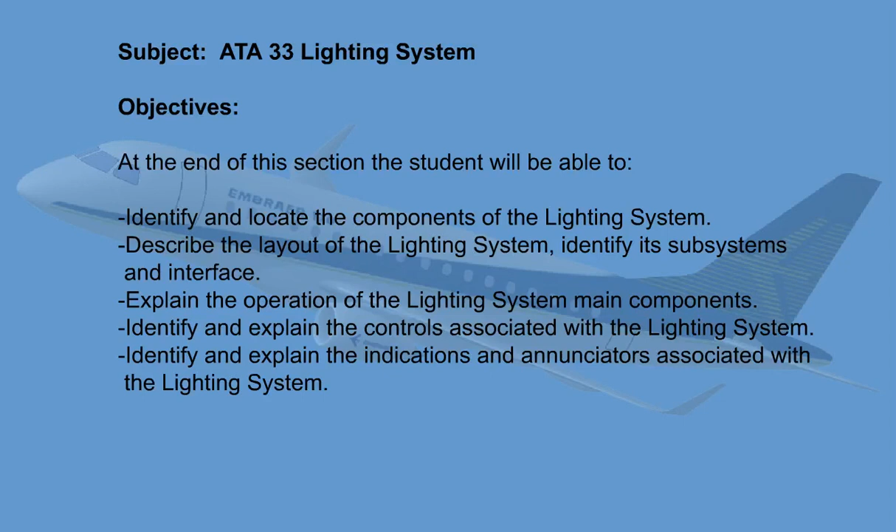The EMBRAER E190 lighting system provides lighting to all essential parts of the aircraft. It assures safe and proper operation under normal and emergency conditions.

Inside the aircraft, light is provided to the cockpit, cabin, cargo and service compartments. Outside light is provided for navigation,

orientation, and identification. In the event of an emergency evacuation, a group of 3 overwing emergency lights located near each overwing emergency exit will illuminate to indicate the evacuation direction. In case of total power loss, power units provide temporary DC power for emergency lighting.

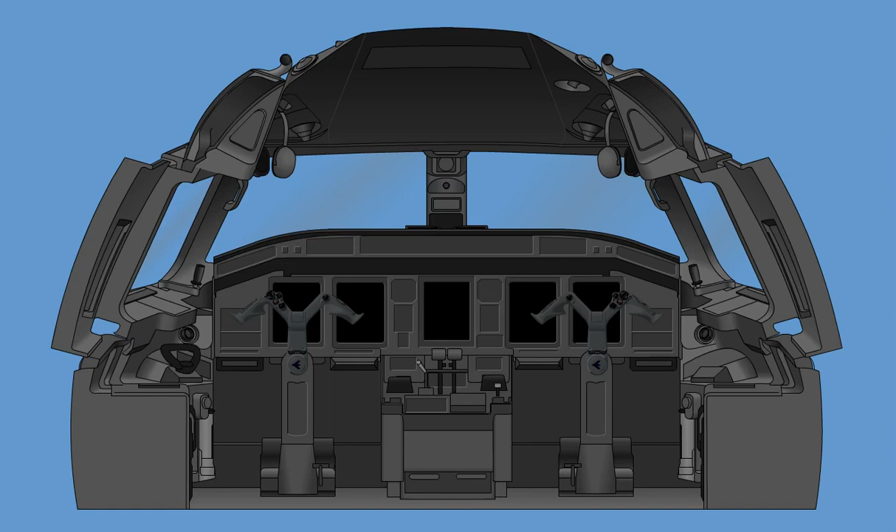The flight compartment lighting system provides lighting to the work area, panels, and instruments, and consists of the following subsystems: the cockpit light system, which provides beam ambient lighting used on the sidewalls, seats, and floor of the crew station and observer area; the instrument and control panel light system, which provides lighting for instruments, panels, and push buttons; and the flood storm light system, which provides a proper lighting level in the cockpit for the instruments and assures instrument readability.

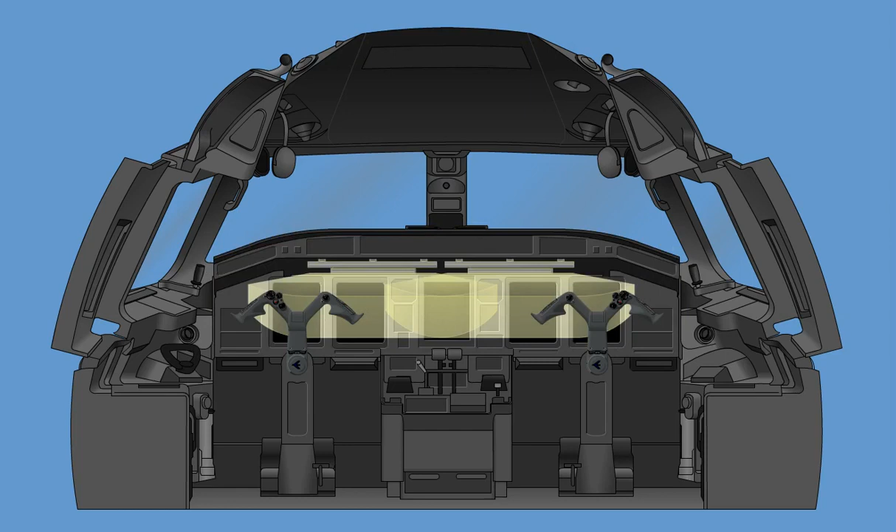The cockpit lights include the following components: 2 dome lights located on the cockpit ceiling, which are controlled by a switch on the overhead panel. Power to the dome lights is supplied by the essential DC bus number 3. This permits cockpit lighting in electrical emergency conditions.

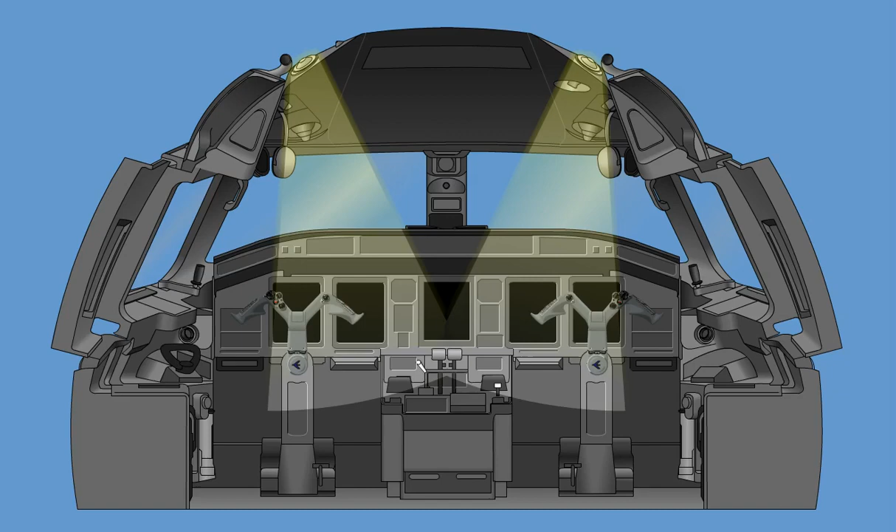The pilot, co-pilot, and observer reading lights installed on the ceiling help the flight crew to read maps, checklists, and manuals. The lighting intensity level can be adjusted by clockwise or counterclockwise movements of the reading light's inner bezel. The units permit light beam orientation, zoom, and full movement in any direction by turning the outer bezel.

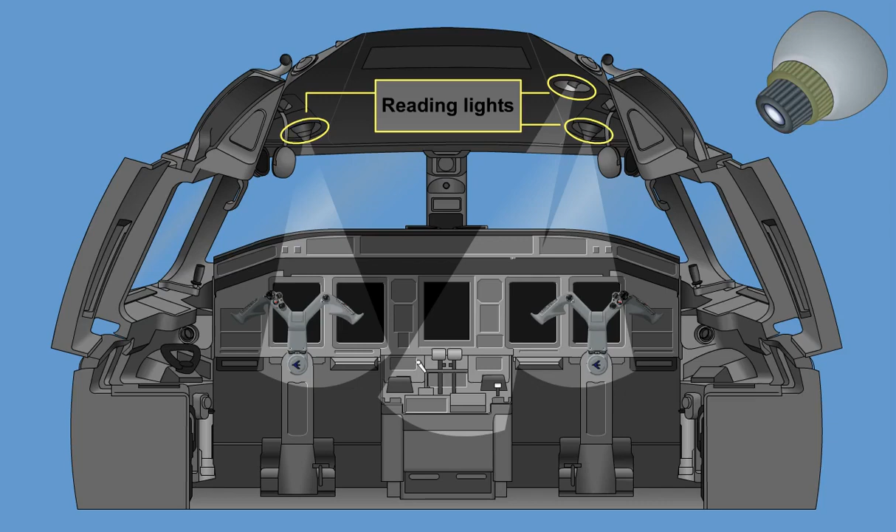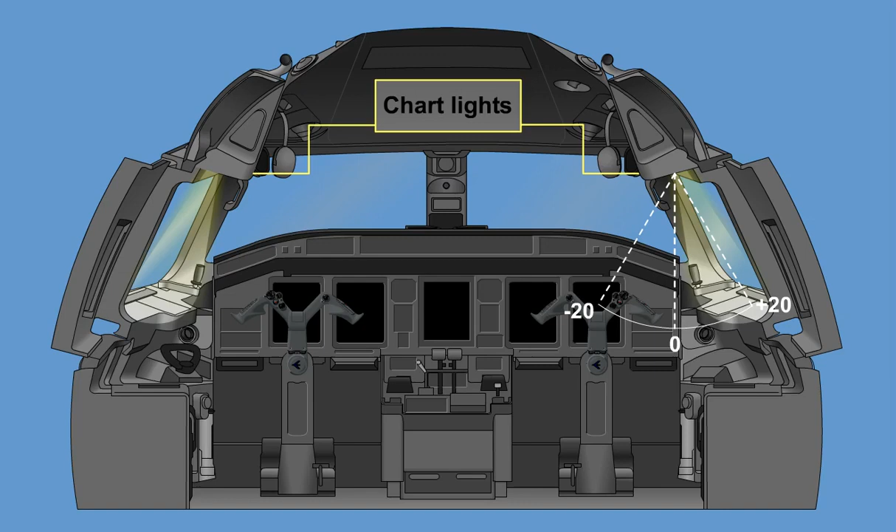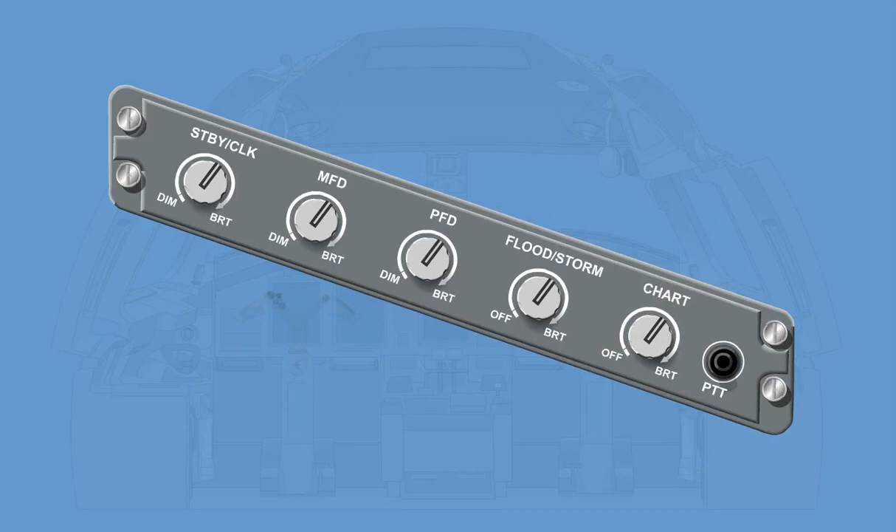The pilot's and co-pilot's chart holder assembly each have an associated chart light for adequate illumination. They are located over the left and right side windows. The light beams can be deflected up to 20 degrees from vertical axis, which provides a total movement of approximately 40 degrees. 2 on-off variable intensity potentiometers, located on the pilot's and co-pilot's glare shield panels, control the chart holder light's brightness.

Turning the knob to the full counterclockwise position turns the light off. Integrated in the overhead panel is the light's control panel. It associates with the on-off variable intensity potentiometers. Turning these potentiometers in the clockwise direction brightens the background lights of the main panel, the overhead panel, and the pedestal.

As a discrete function of the overhead panel potentiometer, the annunciator lights can be set to daylight, bright, and nighttime, dim illumination. Turning the overhead panel lights to the off position will automatically set the annunciator lights to bright intensity.

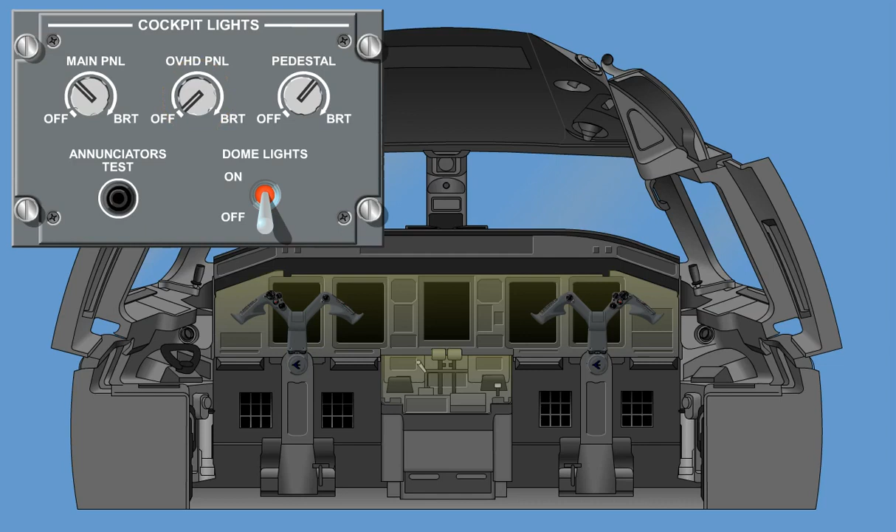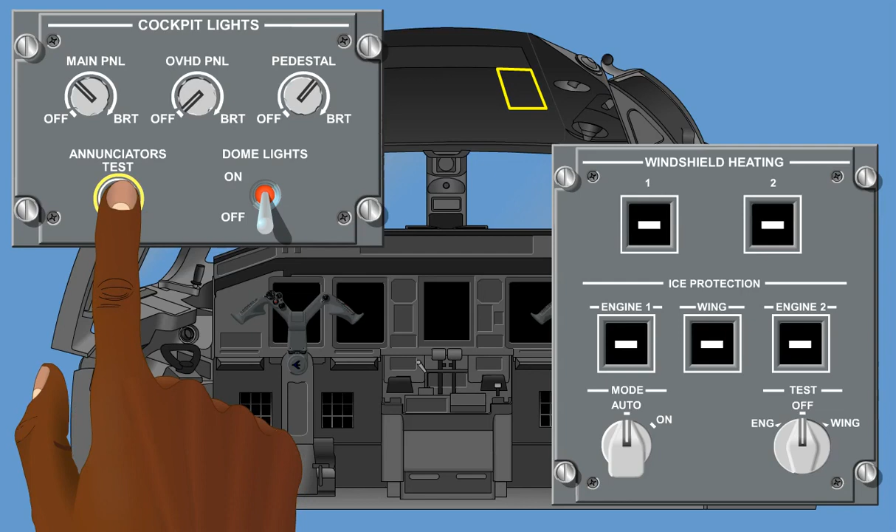The annunciator's test switch, when actuated to the test position, momentary position, allows checking of the striped bars and caption indications in all push buttons located on the main panel, the overhead panel, and the control pedestal, allowing verification of lamp integrity.

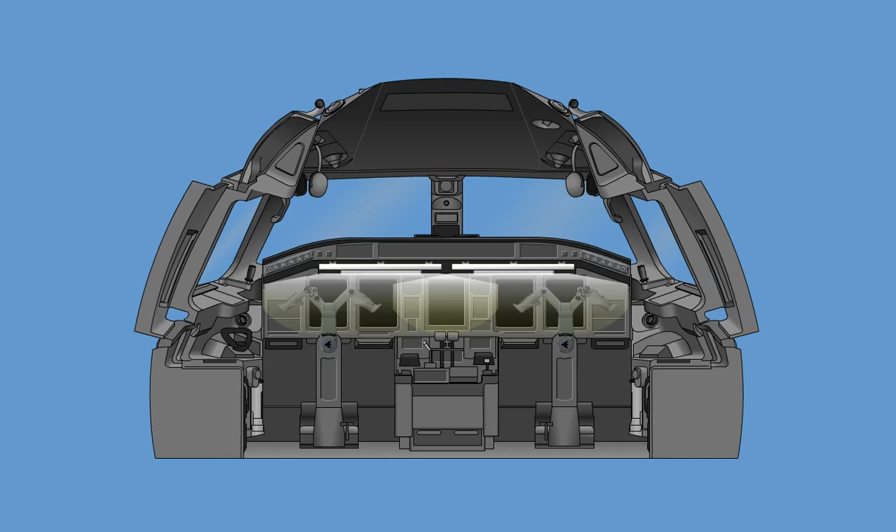The flood or storm lights provide sufficient lighting intensity to illuminate the main cockpit panel during lightning conditions and to avoid blinding of the pilot's and co-pilot's eyes. The floodlights are located under the main panel and controlled by an on-off variable intensity potentiometer on the glare shield panel.

The pilot's PFD, MFD, and EICAS display brightness controls are located on the left glare shield panel, while the co-pilot's PFD, MFD, and standby instruments brightness is controlled from the right glare shield panel.

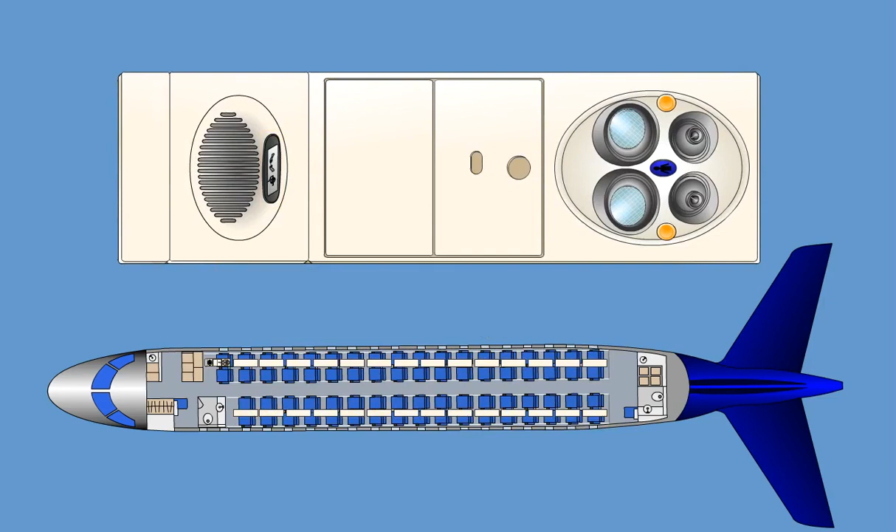The passenger compartment lighting system provides illumination for the cabin. It consists of the passenger cabin light system, the passenger warning signs system, the reading and attendant call light system, the courtesy stair light system,

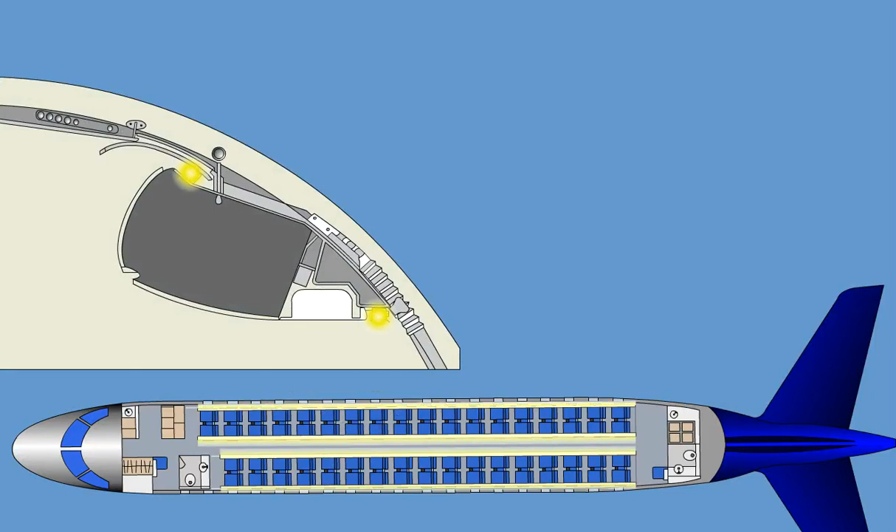the lavatory light system, and the galley light system. The passenger cabin lights provide general illumination of the cabin and include the ceiling lights mounted above the passenger service unit structure and the sidewall lights mounted along the sidewalls.

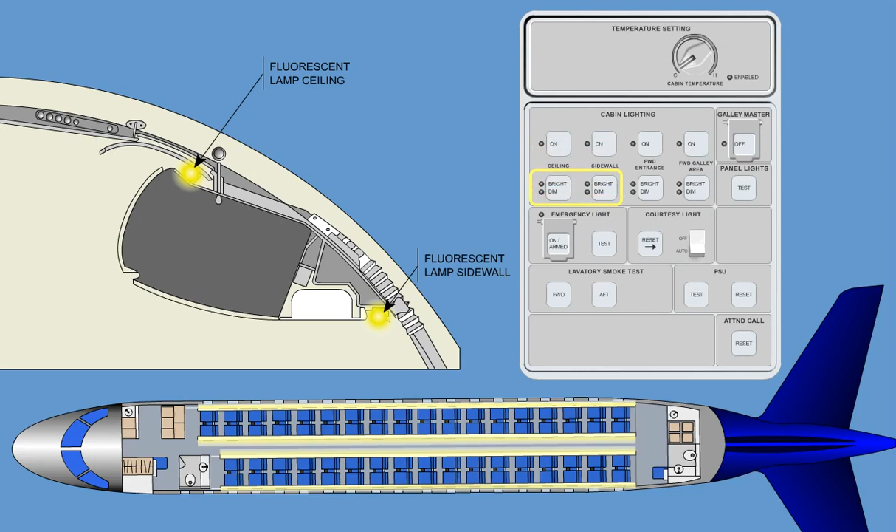Control is provided by 4 switches located on the forward and aft flight attendants panel. 2 of the switches are used to turn the lights on and off, and the other 2 switches are used to control the brightness of the lights.

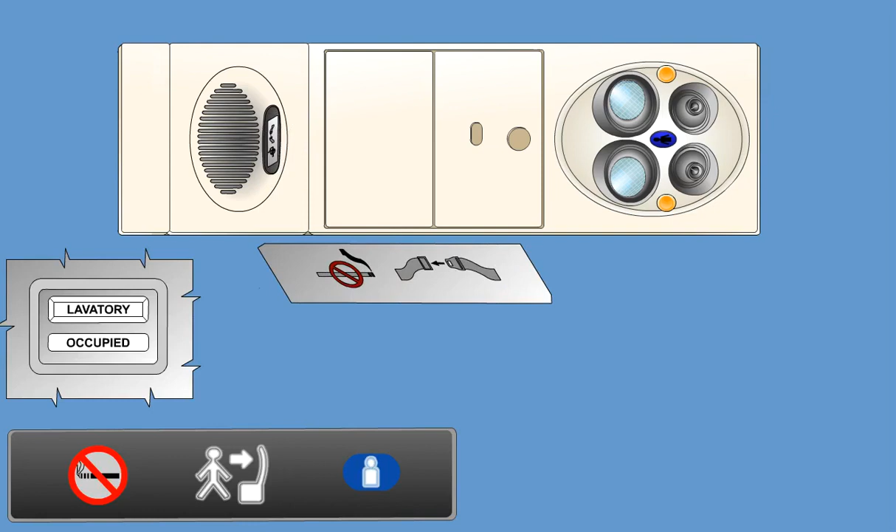The passenger warning signs provide the passengers and flight attendants with the following signs: no smoking, fasten seat belts, return to seat, and lavatory occupied.

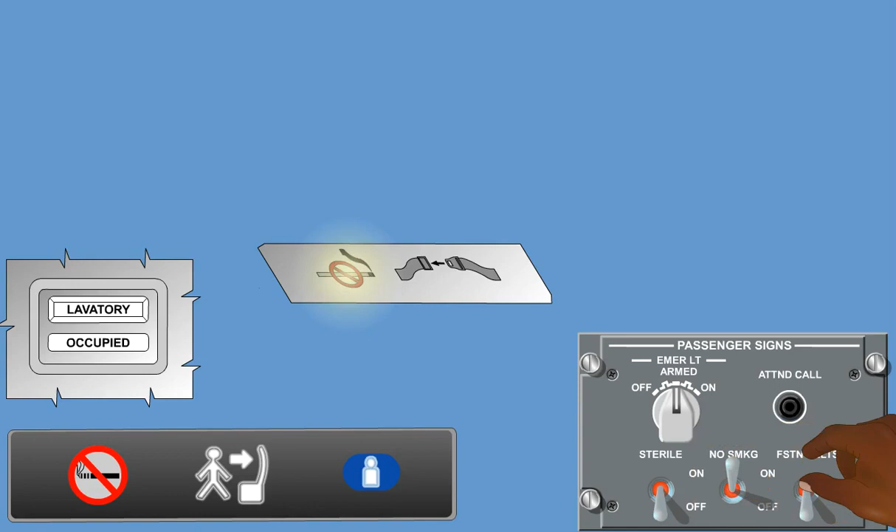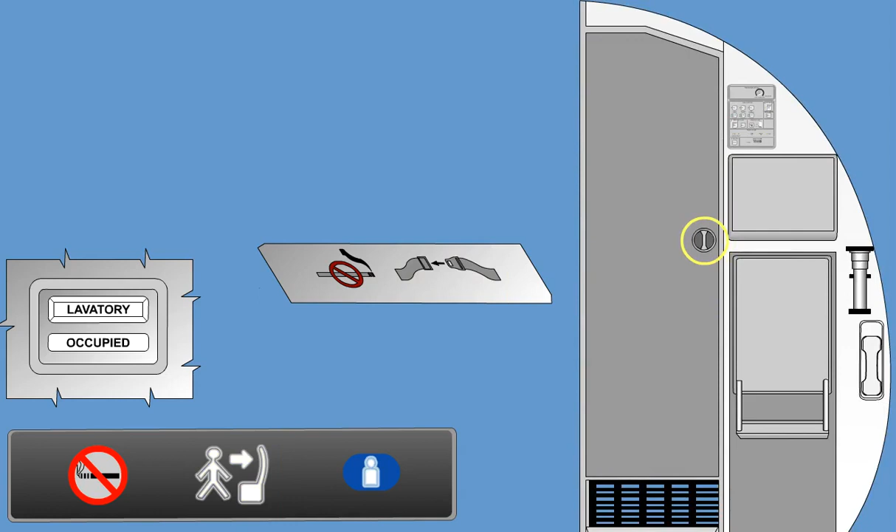The system comprises the no smoking switch located on the overhead panel, which controls the no smoking signs located in the passenger service units; the fasten seatbelt switch, also located on the overhead panel, which controls the fasten seatbelt signs located in the passenger service units, the return to seat sign in the lavatory, and the lavatory door latch engaged switch, which controls the lavatory occupied signs.

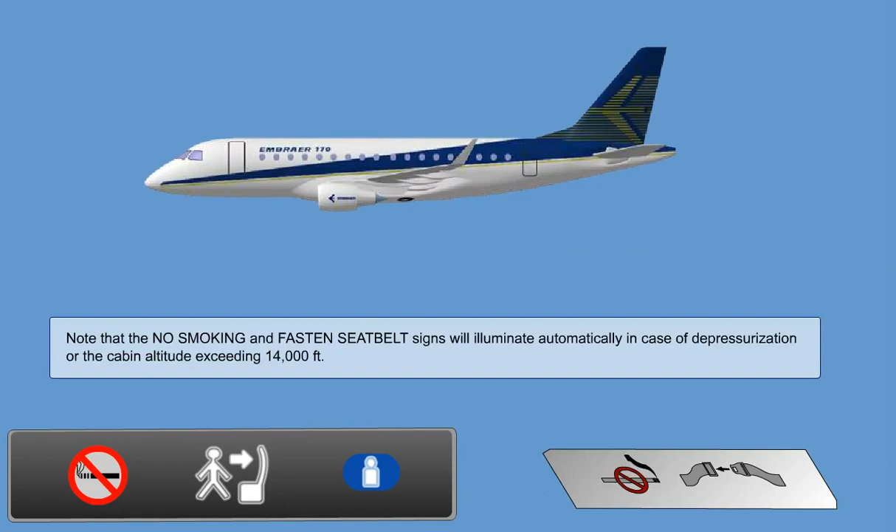Note that the no smoking and fasten seatbelt signs will illuminate automatically in case of depressurization or the cabin altitude exceeding 14,000 feet.

The reading and attendant call light system provides adequate lighting for reading and information for attendants regarding passenger or pilot needs.

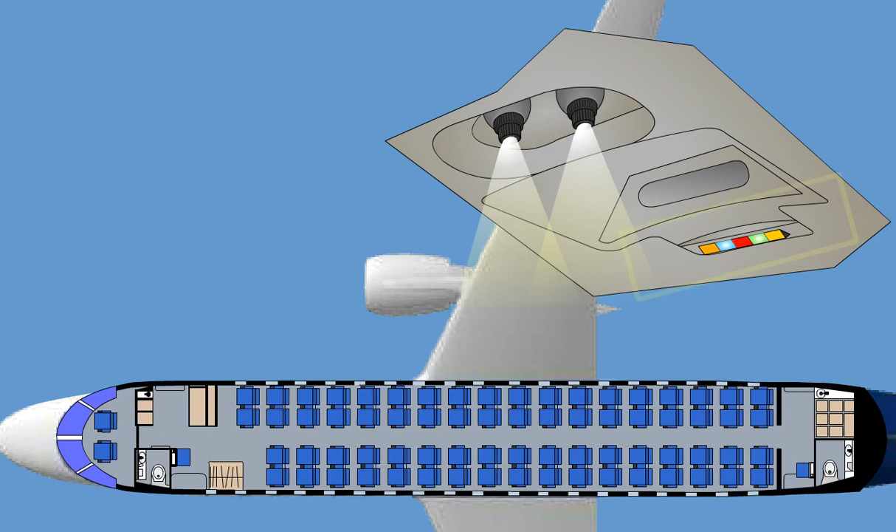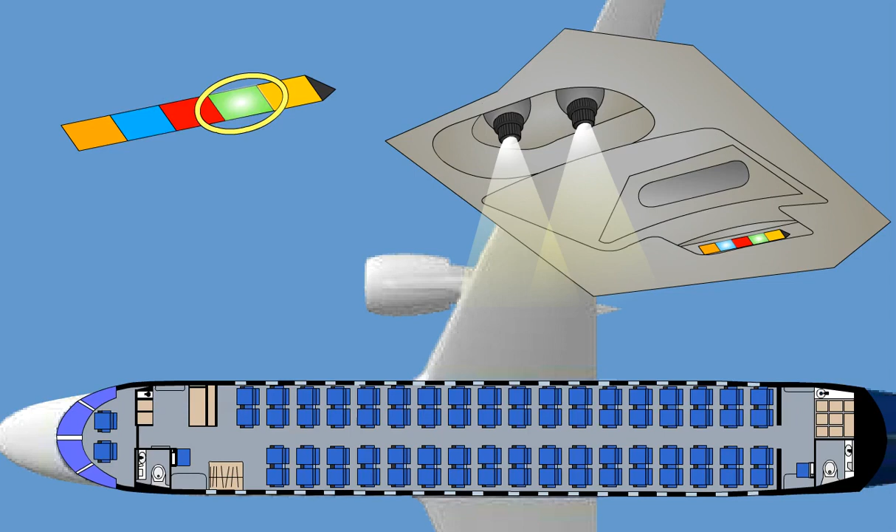Attendant call lights located on the forward and aft main ceiling panel areas provide visual indication to the cabin crew when there is a call from the pilots or passengers. The orange light indicates a lavatory call, the blue light a passenger call, the flashing red light a pilot emergency call, the green light a pilot call, and the ambered colored light indicates a sterile light call.

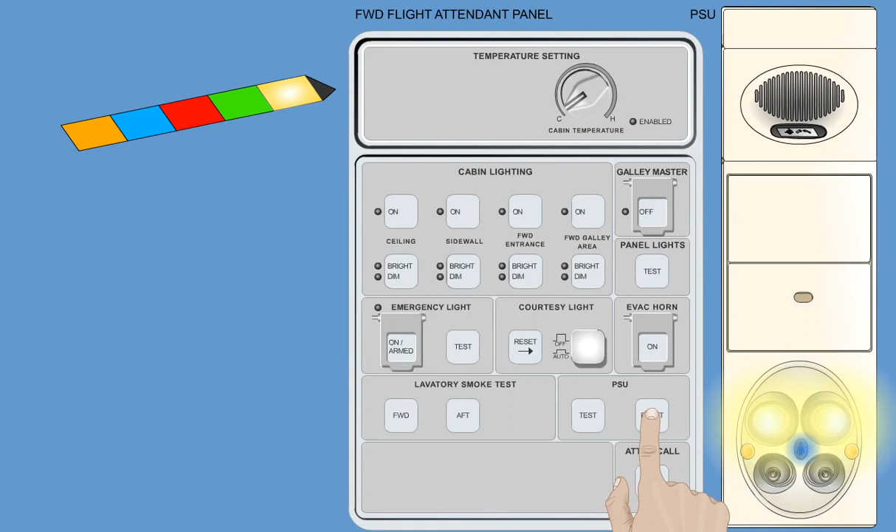Test switches installed on the attendant panel are used to check the PSU reading lights, the attendant call lights, and the attendant call annunciator lights. Attendant call switches are located on each passenger service unit and in the lavatory.

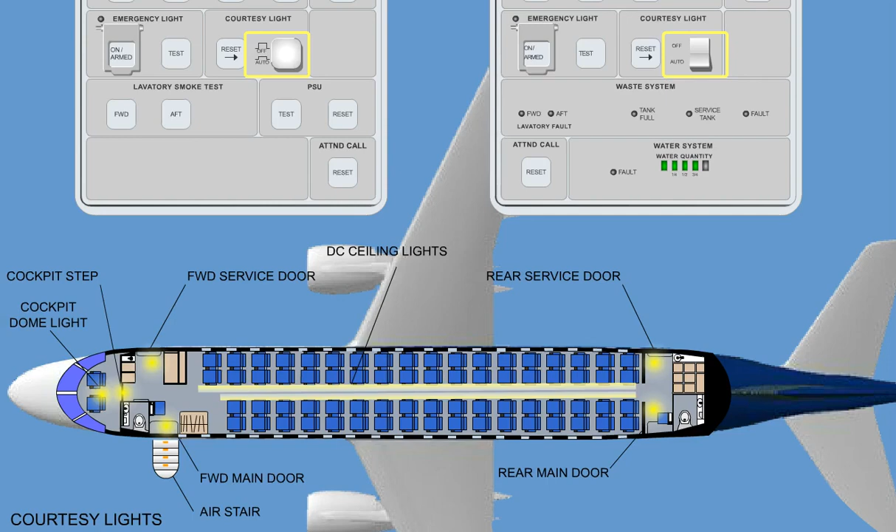The courtesy lights provide lighting for forward and rear main and service door entrances, the air stair, the cockpit step between the cockpit and the cabin, the cockpit dome lights, and the DC ceiling lights mounted on the overhead bins. Courtesy lights are controllable by a switch mounted on the flight attendant panels, giving the crew the option of off or auto mode.

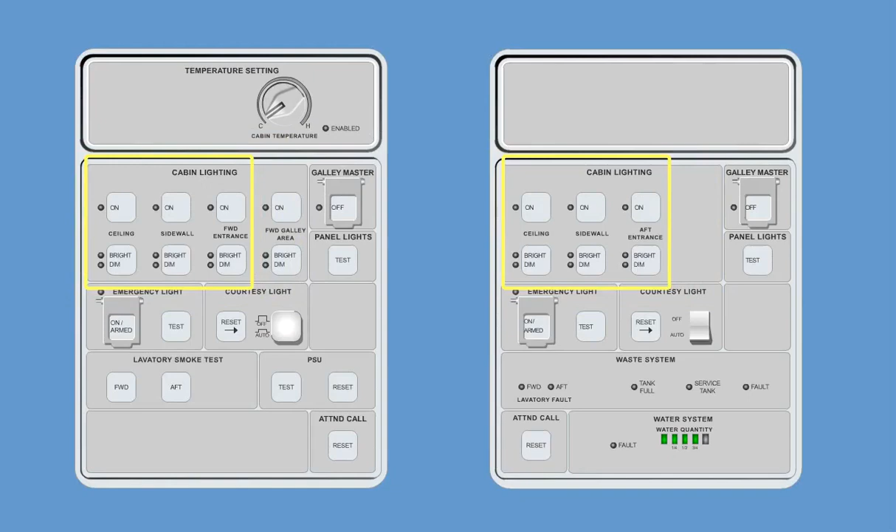Under normal operating conditions, the DC lights are controlled by the cabin lighting system. When normal aircraft power is not available, for example on ground with the APU not running, it is still possible to use the courtesy lights and DC ceiling lights. In this case, the hot bus provides power to these lights. To conserve battery power, these lights operate on a 5-minute cycle. A reset button located on the flight attendant panels, and as an option on the cockpit pedestal panel, allows an additional 5 minutes of lighting every time the switch is pressed.

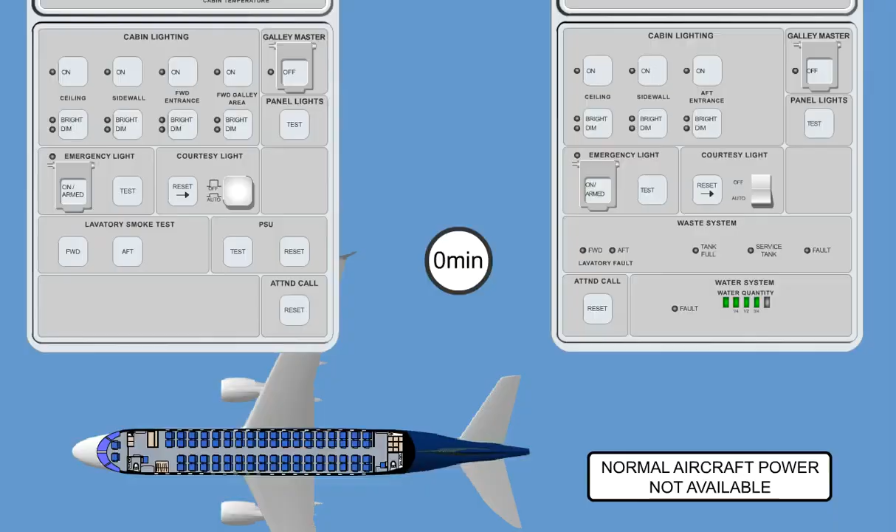The lavatory light system provides ceiling and sidewall lighting in the lavatory area. When electrical power is applied to the aircraft, the ceiling lights come on in dim mode. As long as the toilet door is not latched, the lights remain dimmed.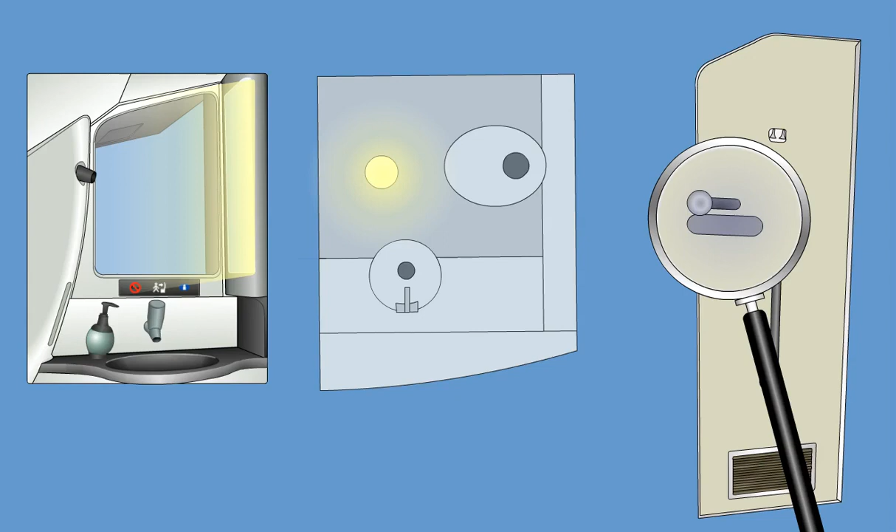If the toilet door is closed and latched, the ceiling lights, the cabinet and sink lights will come on in the bright mode. At the same time, the lavatory occupied sign will illuminate in the cabin.

The forward and aft galley light systems provide a direct light source in the galley area for the flight attendants. The galley lights are controlled by switches installed on the respective flight attendant panels.

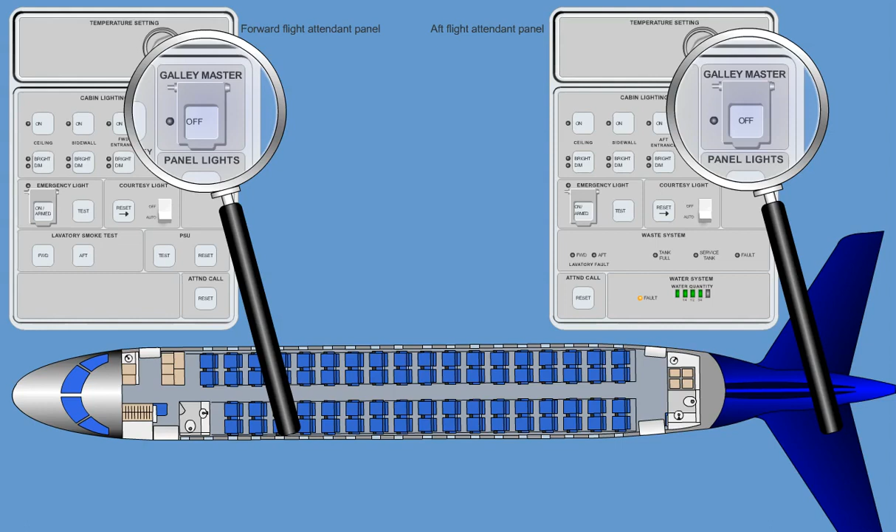Lights are installed in service and cargo compartments to provide technical and ground handling personnel with adequate lighting. All of these compartment lights are activated by a micro switch or manually when the respective compartment door is opened.

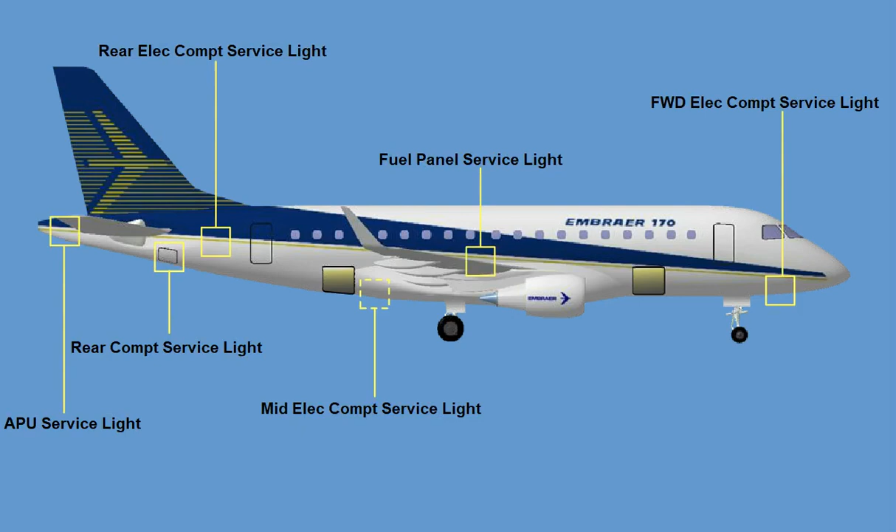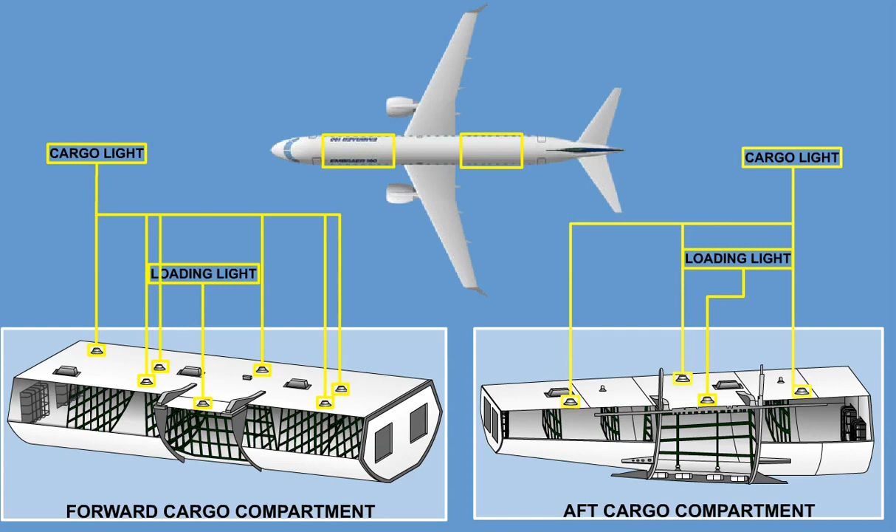The forward cargo compartment has 6 cargo lights and 1 loading light. The aft cargo compartment has 3 cargo lights and 1 loading light. A micro switch on each cargo compartment door controls the cargo compartment lights. A manual switch located by each cargo door can be selected to auto or off position. In auto mode, the cargo lights illuminate when the cargo door is opened and go out when the door closes. The off mode will turn the lights off regardless of the door position.

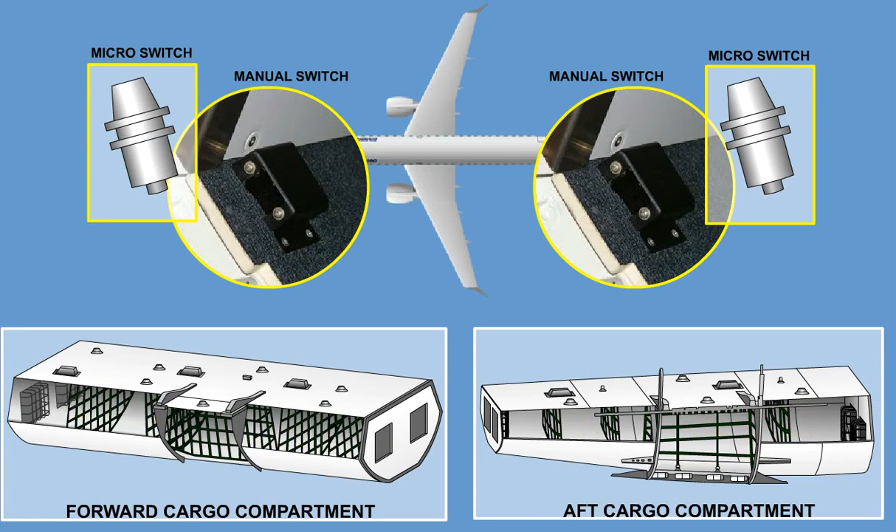The exterior lighting system uses high-intensity lights. These lights are used for taxiing, takeoff, and landing procedures. They are also used for in-flight orientation and identification of aircraft position, and promotion of the aircraft operator logo.

The exterior lights include the following subsystems: the landing lights, the taxi lights, the navigation lights, the inspection lights, the logo lights, and the anti-collision lights.

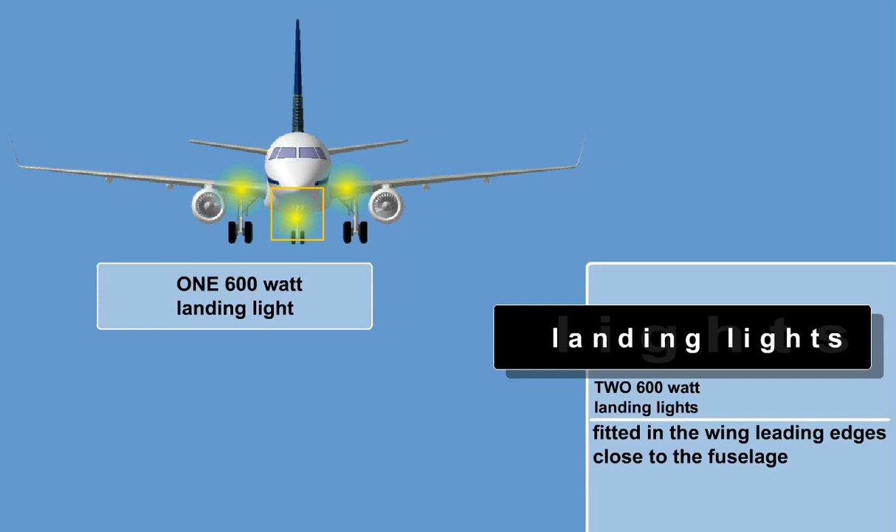2 600-watt landing lights are fitted in the wing leading edges close to the fuselage, and 1 600-watt landing light is installed on the nose landing gear assembly. The landing lights receive 28-volt AC from transformers installed near the wing roots and nose landing gear bay.

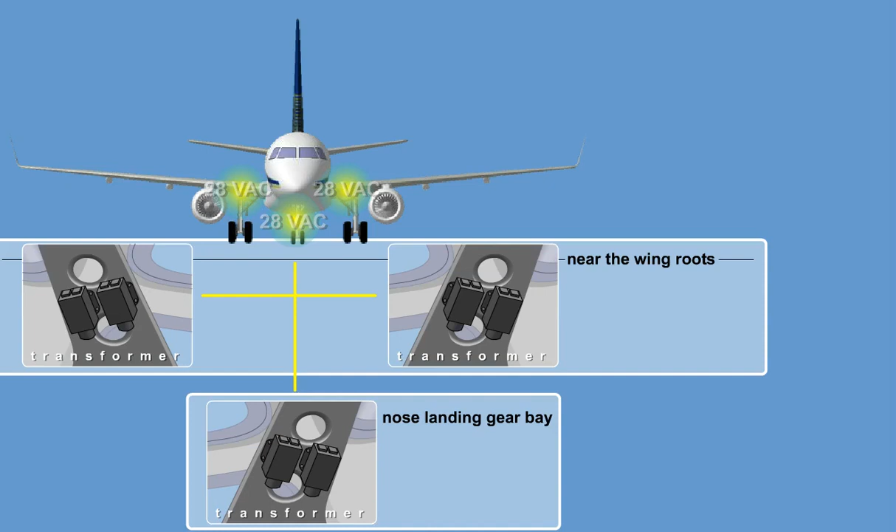They are each controlled by separate switches located on the overhead panel. The landing lights are supplied by SPDA 1 and 2. In case of a single failure, 2 lights are able to provide enough lighting for a safe landing at night. The landing light installed on the nose landing gear will automatically extinguish when the landing gear is retracted.

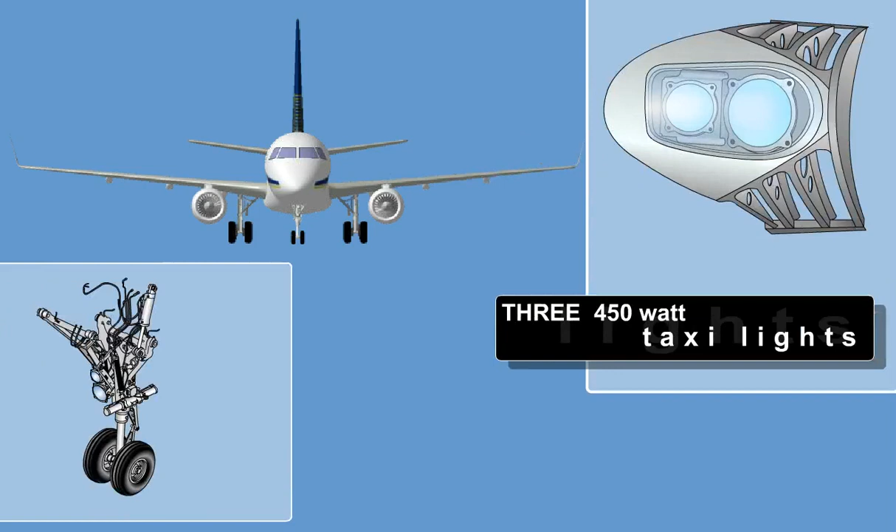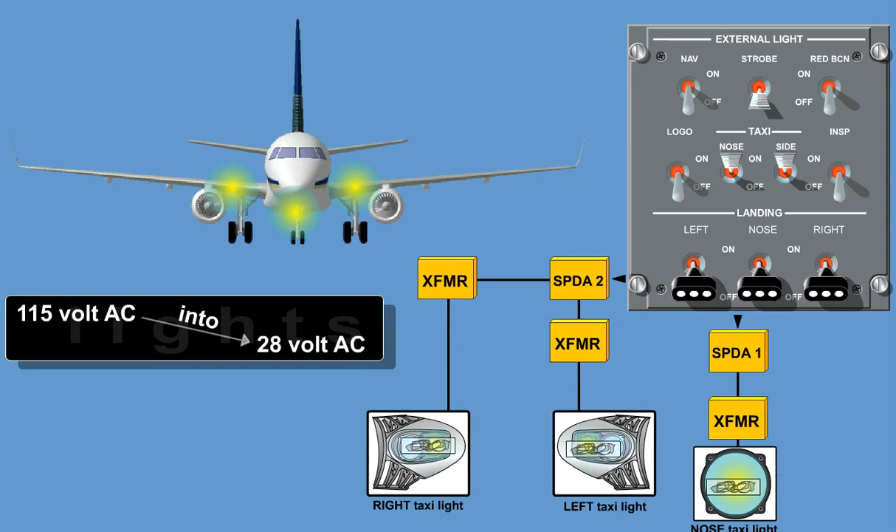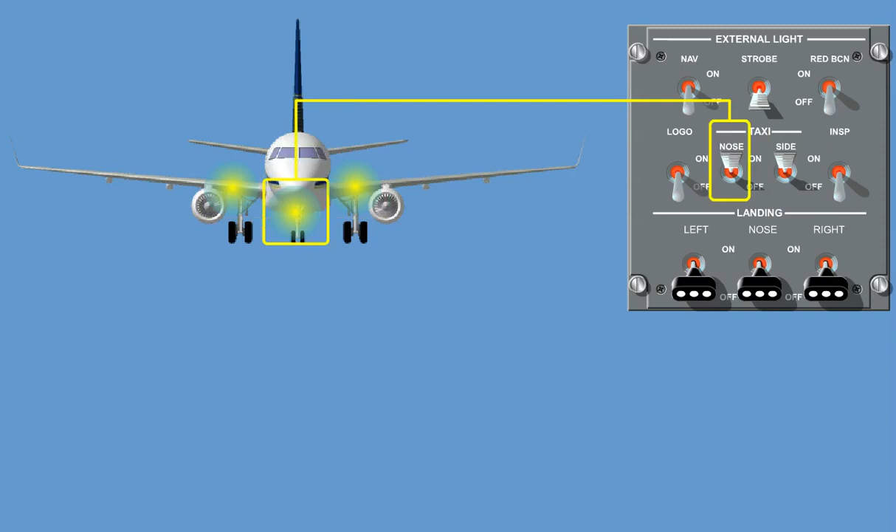The ERJ-170 has a total of 3 450-watt taxi lights. Their location is similar to the landing lights, 2 in the wing roots and 1 on the nose landing gear assembly. 115 volts AC from SPDA 1 and 2 is transformed into 28 volts AC and then provided to the 3 taxi lights. The taxi lights have 2 separate switches for appropriate ambient lighting. The 2 taxi lights in the wing-to-fuselage fairing have a common switch, while the nose wheel taxi light has a separate switch. The nose gear taxi light will automatically extinguish if the nose gear is not in the down-locked position.

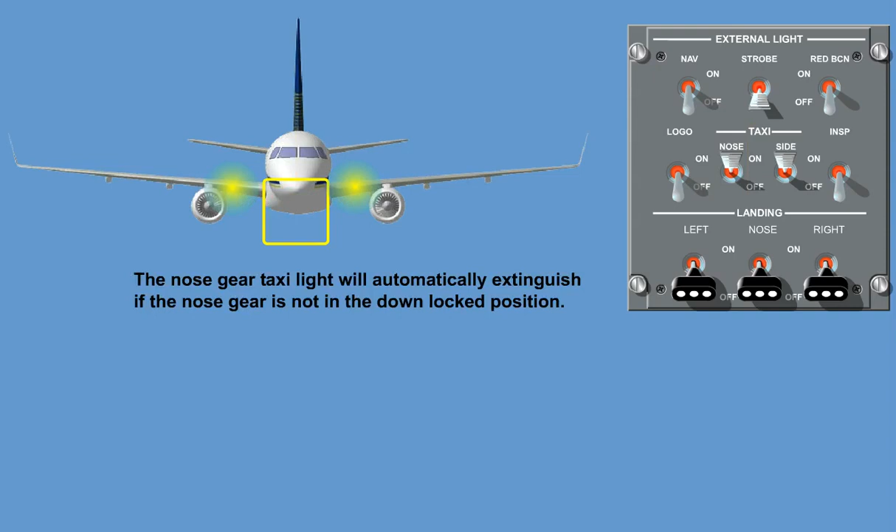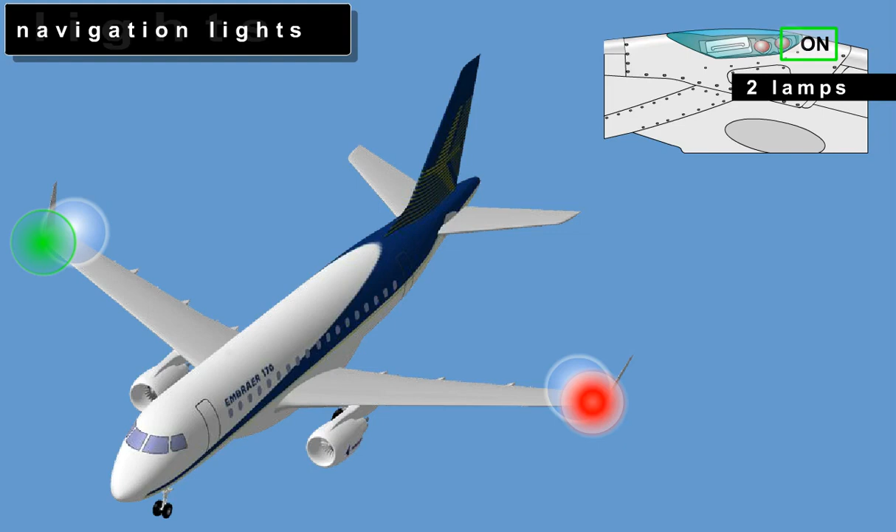2 navigation lights, or nav light assemblies, are installed inside a transparent cover assembly on each wingtip, front and rear side. They are turned on via the external lights panel. Each light assembly has 2 lamps, and normally only 1 lamp is on while the second lamp is on standby. The standby navigation light is a redundant light and increases the aircraft dispatchability.

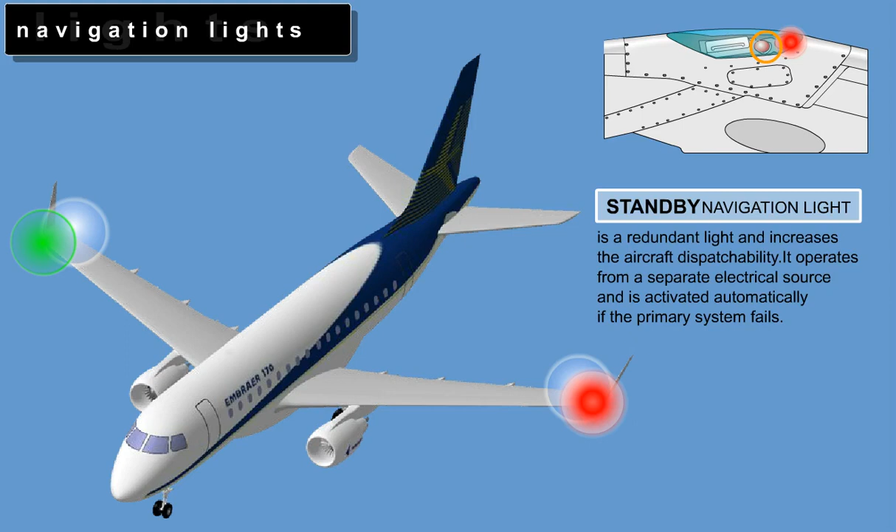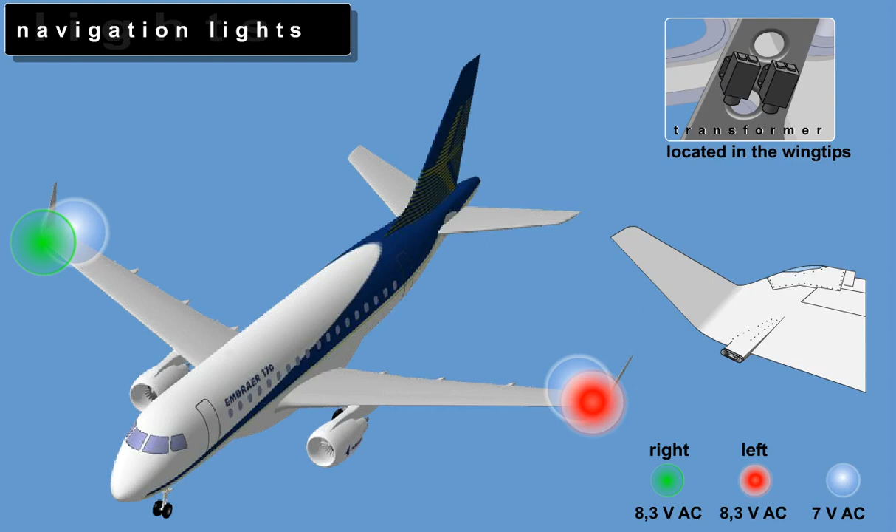In accordance with international law, the left nav light is red, while the right one is green. The nav lights, which help the aircraft to be visible from behind, are white in color.

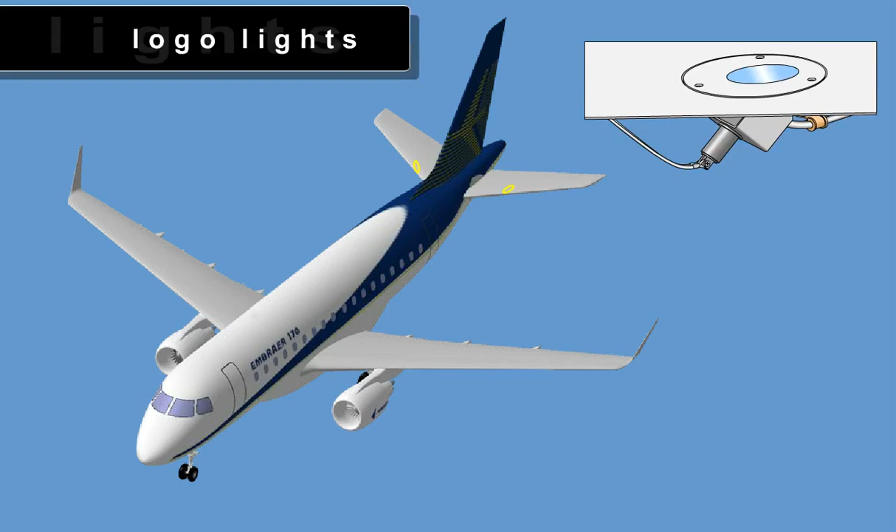The logo light system provides lighting for the carrier's logo located on the vertical stabilizer. The two 150-watt sealed beam lamps for the logo type lights are installed on each side of the horizontal stabilizer. The logo lights are controlled by the logo type light switch located on the overhead panel.

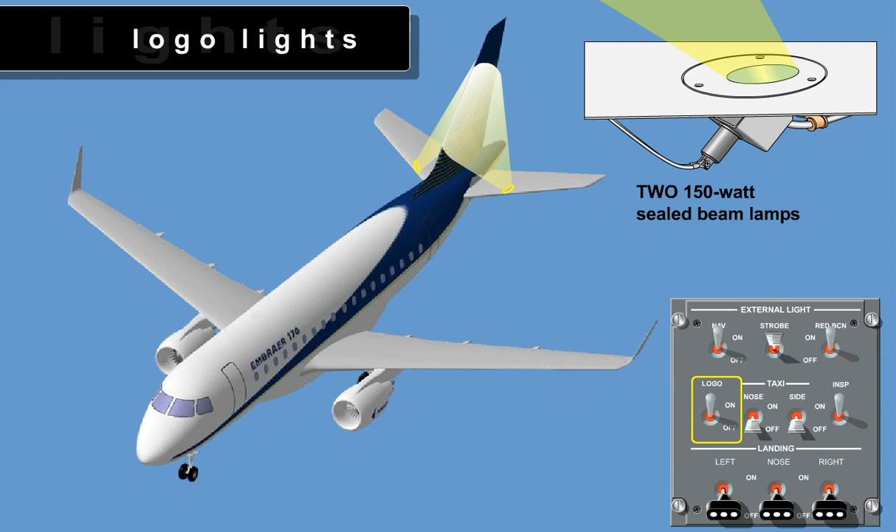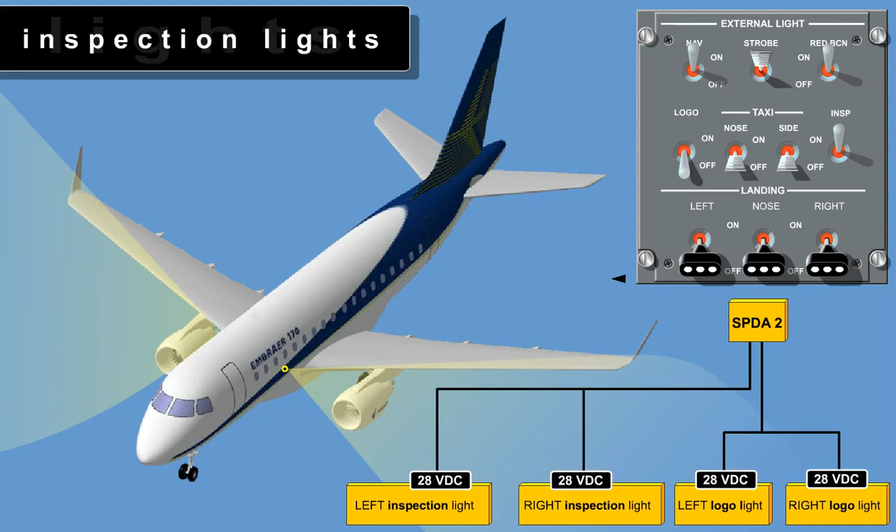Wing inspection lights enable the flight crew to detect ice buildup on the engine intake and wing leading edges. The lights are installed in the forward part of the main fuselage and are controlled by the inspection switch located on the overhead panel. The wing inspection lights and the logo lights use 28-volt DC supplied directly from SPDA2.

The anti-collision light system includes the strobe lights and red beacon lights. The four strobe lights supply reference from one aircraft to another when in flight. The white 400 candle strobe light lamps are installed inside a transparent cover assembly in the forward and rear edge of both wingtips. Associated with each strobe light is a power supply located inside the wing. The strobe lights are controlled by the strobe light switch located on the overhead panel.

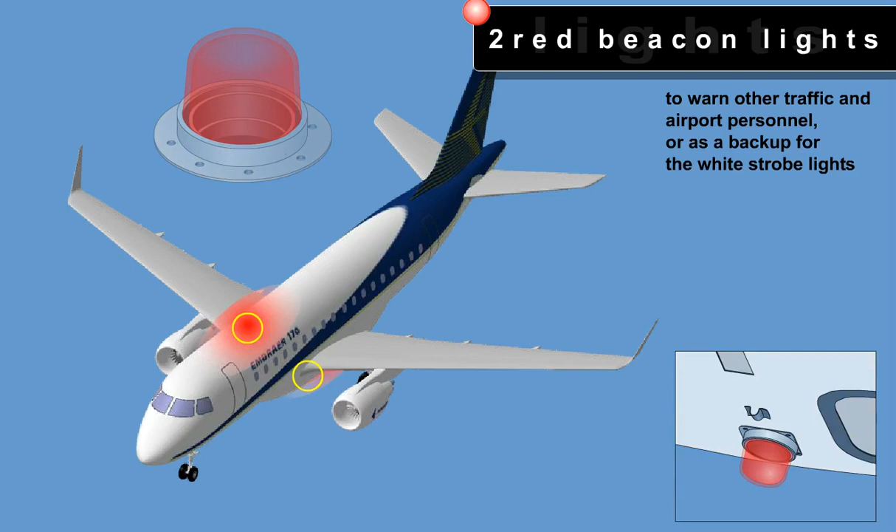The red beacon lights are used for ground operations to warn other traffic and airport personnel, or as a backup for the white strobe lights. The two red beacon lights are installed on top and below the main fuselage, each with separate power supplies. The upper power supply is located on the left-hand side of the forward baggage bay door, and the lower power supply is located at the central wing to fuselage fairing.

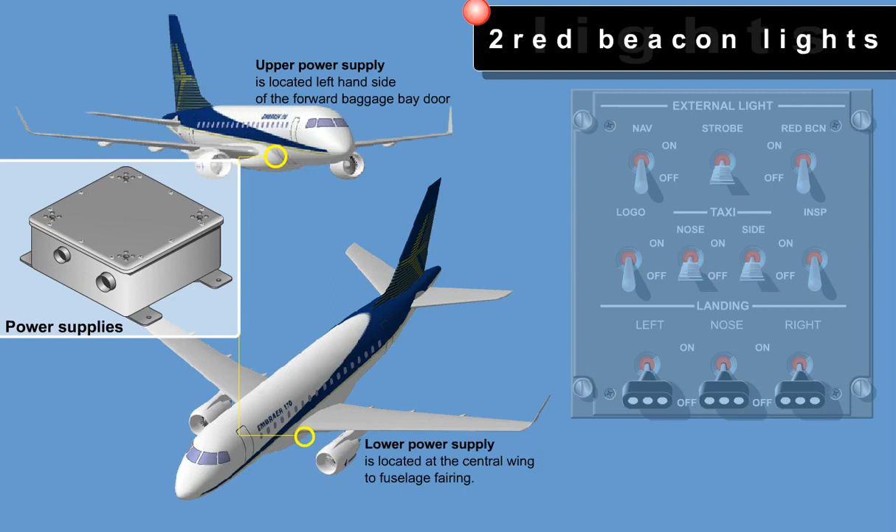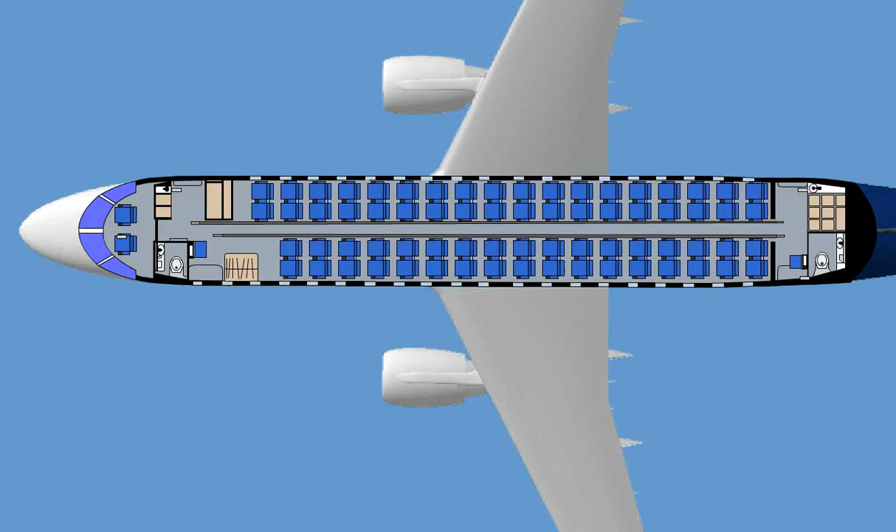The emergency light system provides lighting in case there is an electrical emergency condition. It provides enough cabin and exterior lighting to assure safe crew and passenger evacuation even in poor visibility conditions.

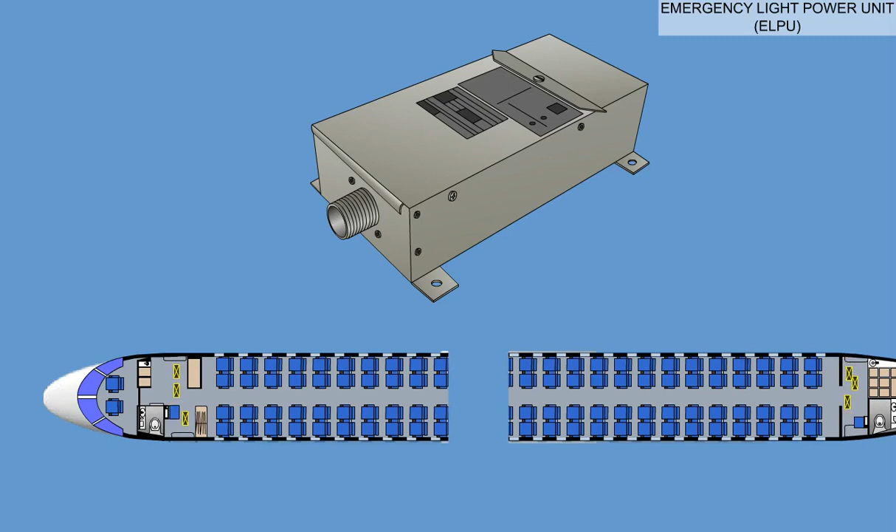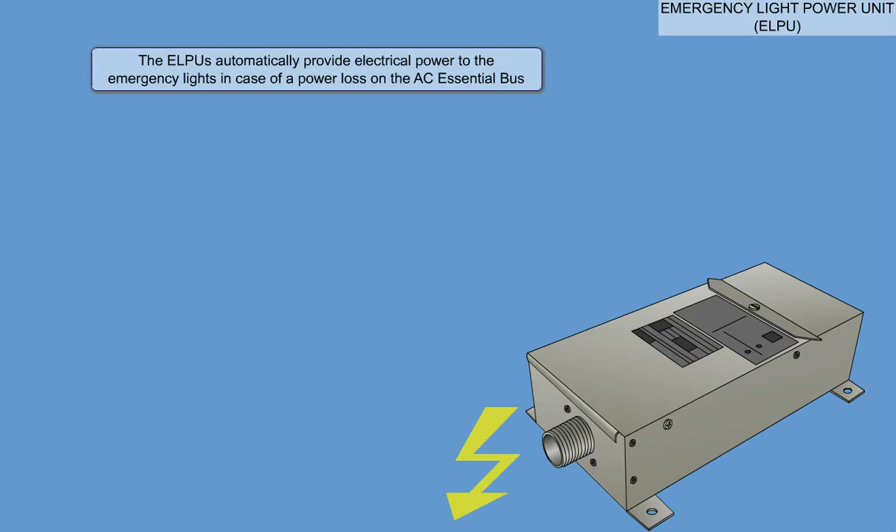The emergency lighting system is powered by 6 emergency light power units, ELPUs. 3 ELPUs are installed in the forward section and 3 in the rear section of the fuselage to ensure power supply in case the cabin breaks apart after a crash landing. The ELPUs automatically provide electrical power to the emergency lights in case of a power loss on the AC essential bus, if commanded by the crew, if in test mode, or if activated from the flight attendant panel. The ELPUs enable emergency illumination for at least 10 minutes.

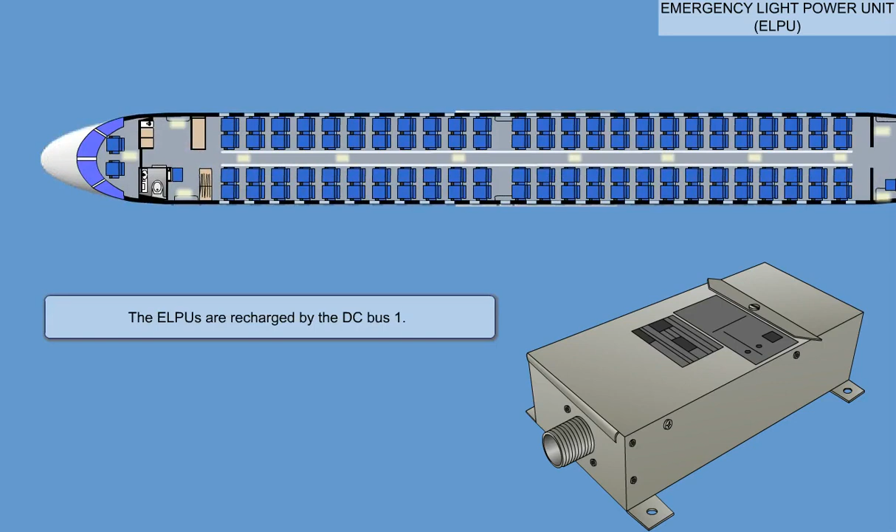The ELPUs are recharged by the DC Bus 1.

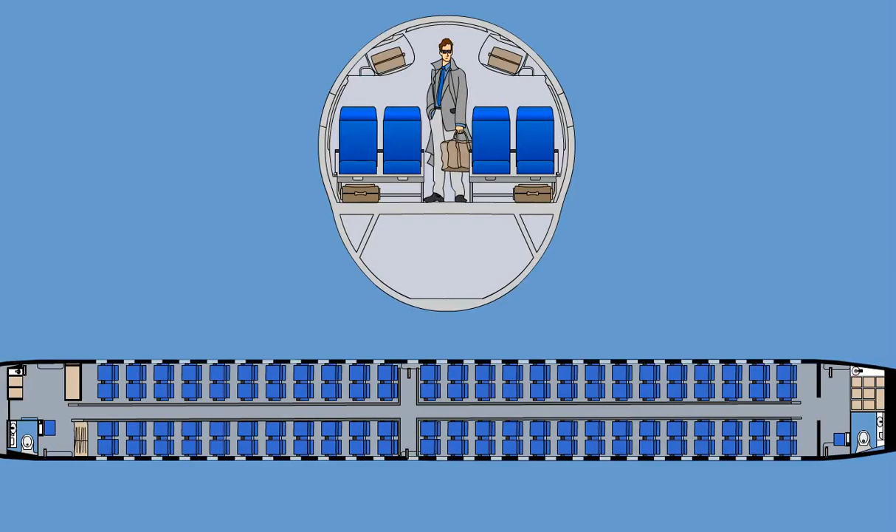All 6 emergency exits are marked with exit locators, markers, and identifiers which are clearly visible when energized under conditions of complete darkness. For general cabin emergency illumination, floodlight assemblies are installed on the aisle ceiling panels distributed along the fuselage.

4 emergency exit area floodlight assemblies are installed at each exit. Their purpose is to illuminate the passageway leading from the main aisle to each of the 4 exit openings.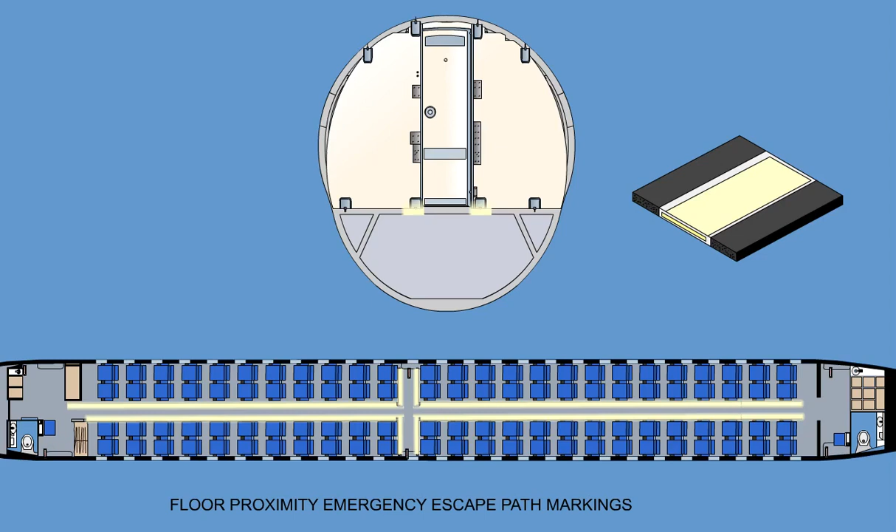The floor proximity emergency escape path markings are a photoluminescent type and guide passengers to the nearest exit in conditions of dense smoke. The photoluminescent escape path marking near the overwing emergency exits contain red arrows to indicate the exit route.

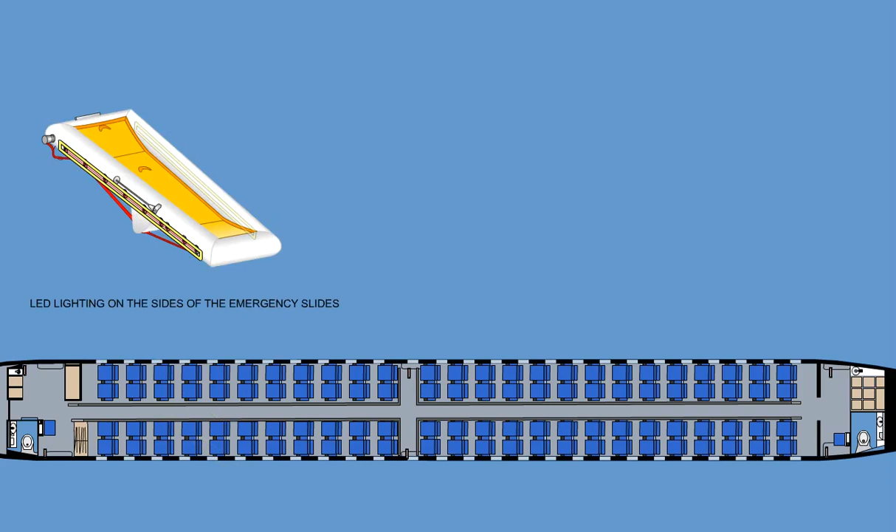Once outside, the passengers are provided with LED lighting on the sides of the emergency slides, and also by a group of 3 overwing emergency lights located near each overwing emergency exit to indicate the evacuation direction.

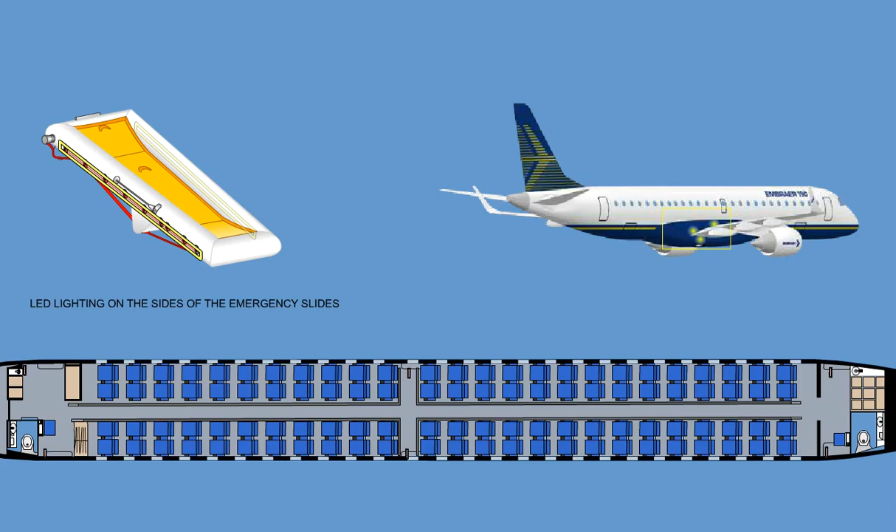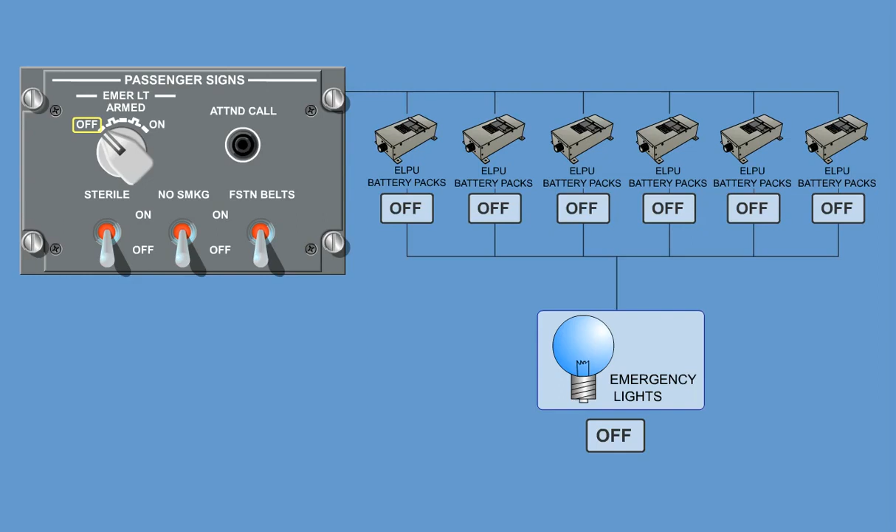The emergency light system may be commanded by the emergency light switch located on the overhead panel, or by the attendant emergency light switch located on the attendant control panel. The emergency light switch in the cockpit has 3 positions. In the off position, the emergency lights are permanently turned off. This position prevents the emergency lights from illuminating and the batteries from being drained after normal power shutdown.

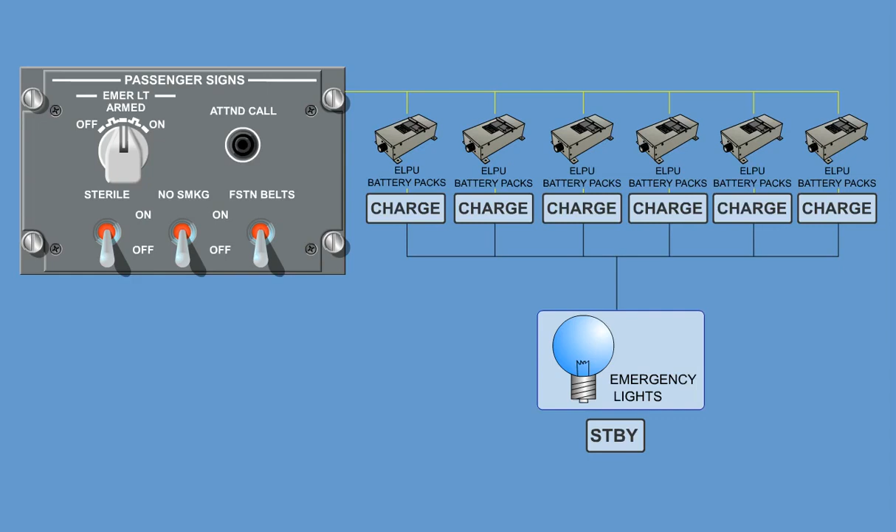In the arm position, the emergency lights are in standby mode and the batteries are charged. When normal aircraft power is lost, the emergency lights will automatically illuminate by power from the ELPU battery packs. In the on position, the emergency lights are manually turned on and supplied by power from the ELPU battery pack.

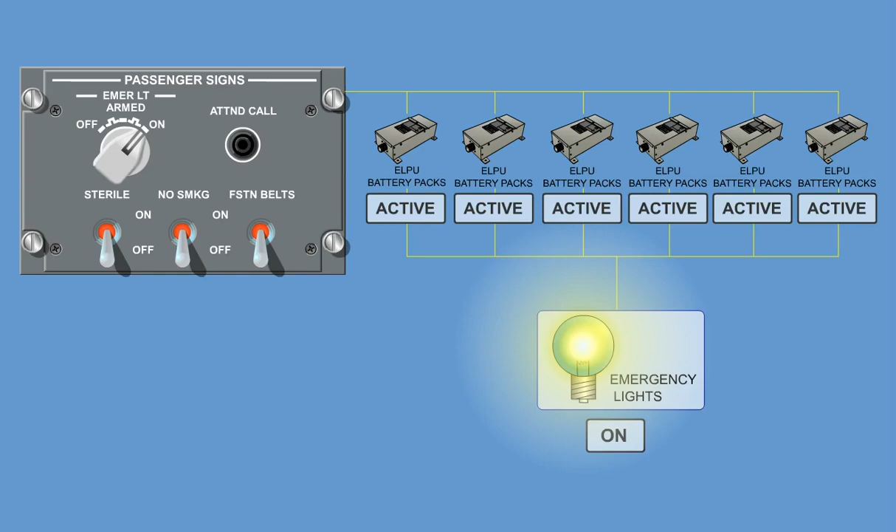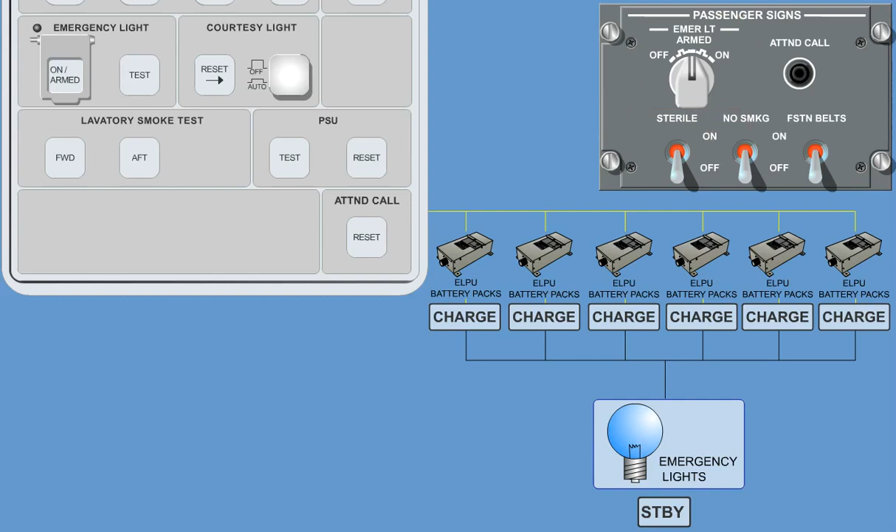The emergency light switch on the cabin attendant panel has two positions. In the armed position, the emergency lights remain in the mode determined by the cockpit switch; this is the normal flight position. In the on position, the emergency lights are turned on using power from the battery packs, regardless of the cockpit emergency light switch position. The legend ON, located in the attendant control panel, is illuminated to indicate the switch selection mode. Note that the message will be displayed on the EICAS.

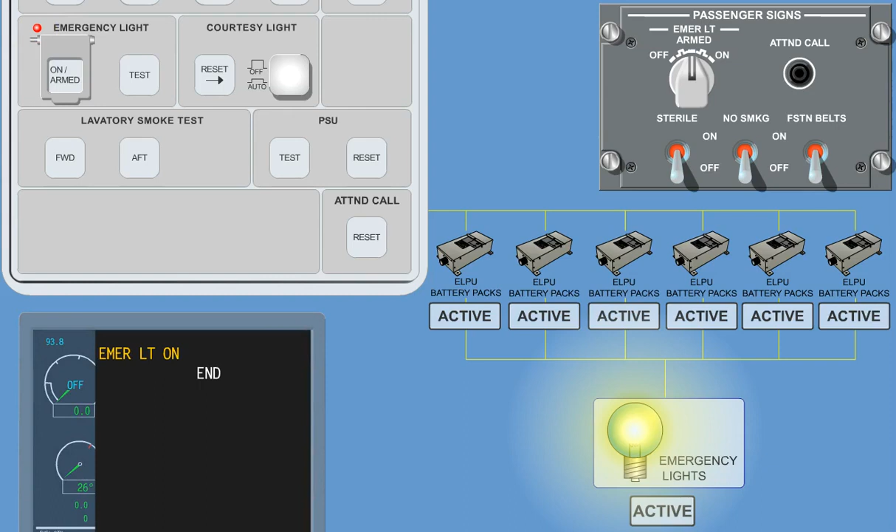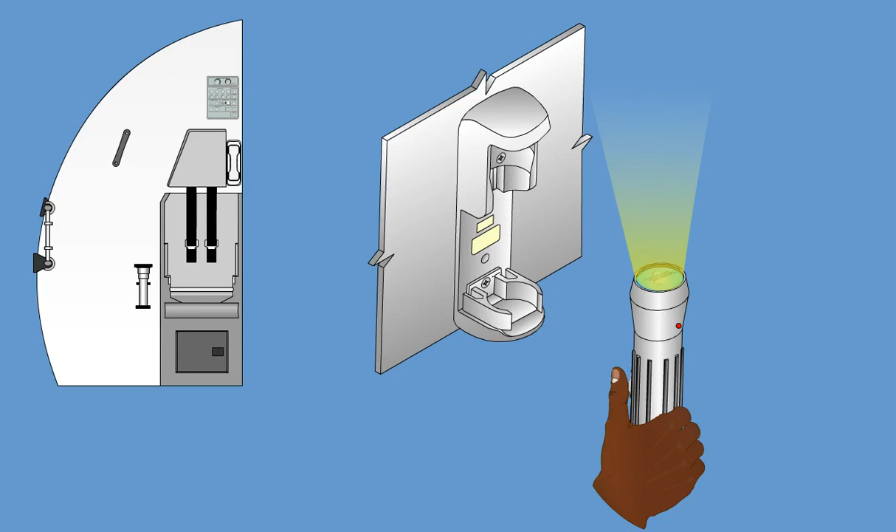Two flashlights are provided to help the crew during an emergency condition. The flashlight can be activated manually when it is removed from the retention bracket through a slide switch located on the flashlight body. It provides up to 45 minutes of illumination.

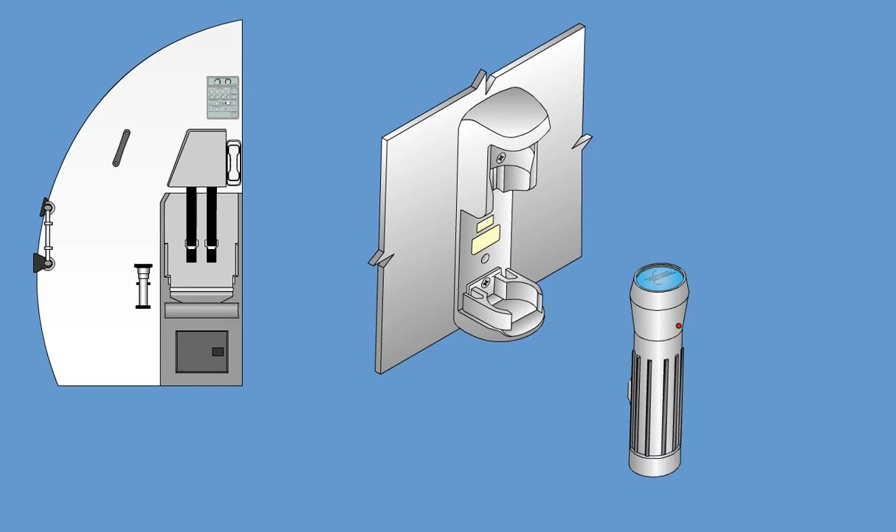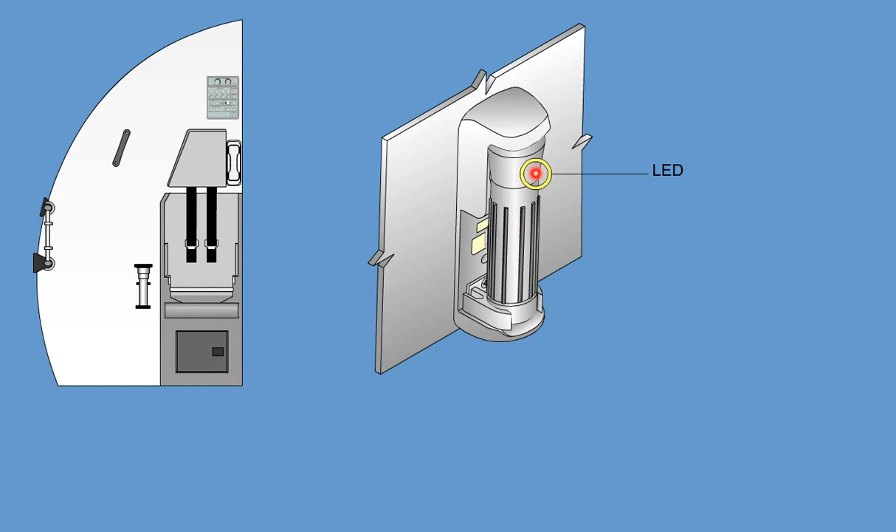To turn the flashlight off, you return the slide switch to the normal position. Each flashlight has a 6-volt DC NiCad battery, which is recharged when the flashlight is inserted into its retention bracket. An internal circuit controls the battery recharging process, which can be monitored via an LED indicator near the head of the flashlight. Warning: do not reinsert the flashlight with the slide switch left in the on position, as this will result in overheating of and damage to the flashlight assembly.